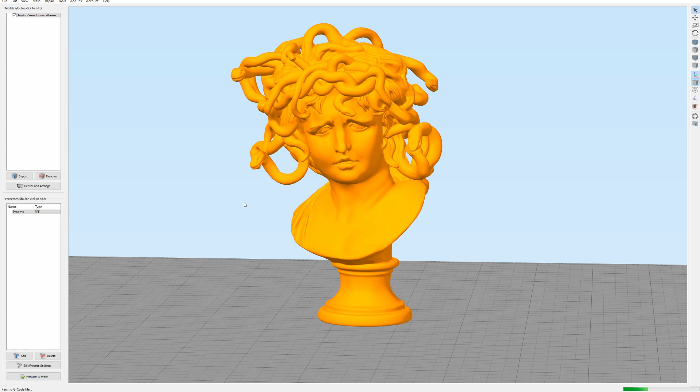Let's go to my left monitor and take a look over here. You can see that this print is going to be very challenging to print, because if I would prepare this for printing, I'm using the Simplify 3D slicer and it's now calculating the print and how it would make the G-code. This is going to be a very difficult print.

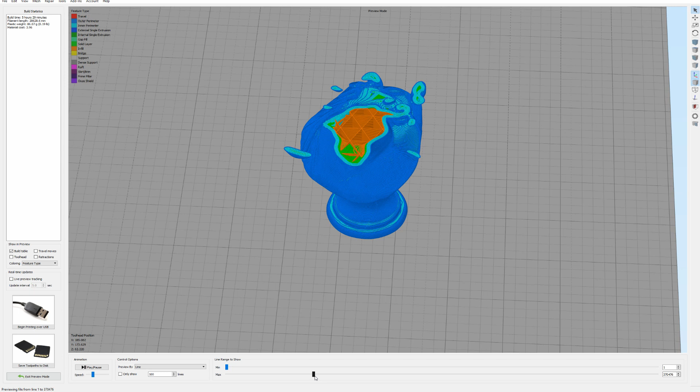I can show you guys here, because when this is printing, then suddenly here mid-air this starts to happen. It's going to try to put some filament, and the filament can't rest on something, so this won't be printable. The filament will be oozing out of the nozzle and will be hitting against the wall if you start to print things like this.

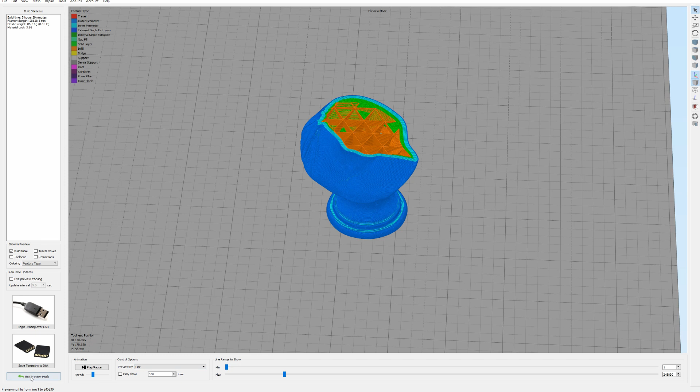Now there is a way we can support this, and the way to support this is by going back to the fabrication settings and just turning on support. Now when I've done this and I go to prepare this print again, then you will see that we generate some support, but we still have a problem.

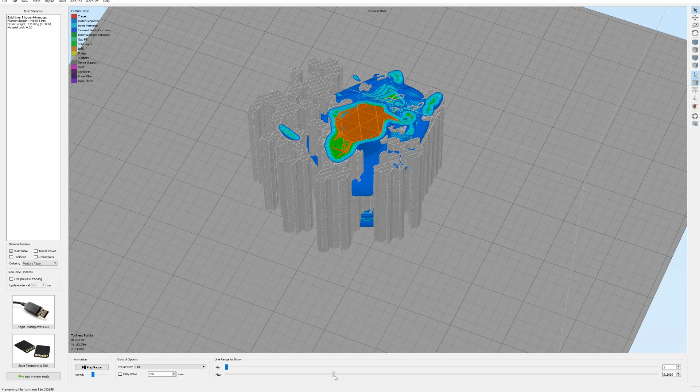As it's being calculated now, I can show you guys what the problem will be. Here I got the file, and it's printing everything with support structures. These pillars here are the support structures that will be printed. When we come to the point where things mid-air, like here for example, will be printed, then this will be printed on the support structure. So the filament basically stays in place, and this is how we can print the parts that are being printed mid-air.

Now I don't know if some of you already tried playing with support structures, but then you know that this is a very challenging part. The reason is that these are very thin lines that are being printed, and those very thin lines have a tendency to break away from the print bed. So they break away from your build platform, and therefore your support is not being strong.

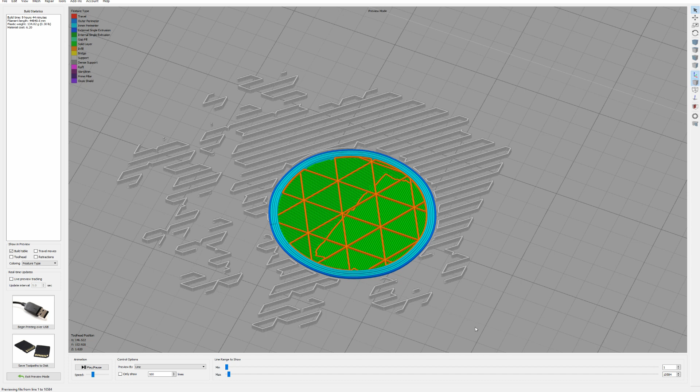There are things we can do about it, especially here in Simplify 3D. So I go back to the fabrication settings again, I go to my support tab, and here you can see that I can add some support parameters. Let me first add as an angle the 0 degree angle. So now we've got a 45 degree angle and a 0 degree angle. And I'm going to put another one in there as well, the 135 degree angle.

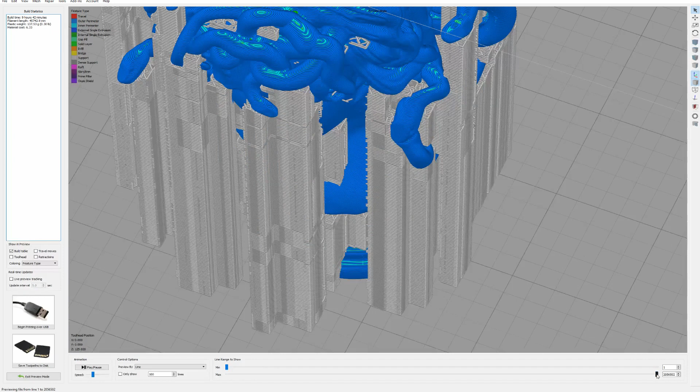Now you will see that when I prepare this for the print and it's being calculated, that something strange is going to happen. We are now building a very fundamental support structure. As you can see now, the support structures don't only have those lines like this, which was the 45 degree angle we normally used, but they also got a 135 degree angle and a 0 degree angle. And now there will be a much better adhesion to your printer bed.

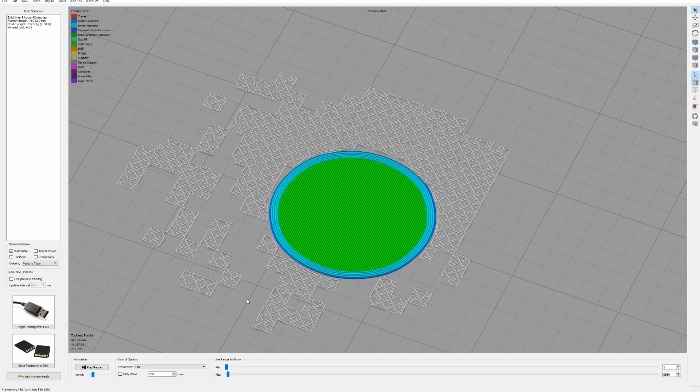So now this support won't break away that easy from your print bed. And this has to be a very high support, and then the chances are that even then this is going to break away from the print bed. So we have to make it even sturdier than it is right now.

I'm going to show you guys how I'm going to do this. Again, we go to the fabrication settings, and now we go to the additions, and we are going to use a raft. A raft is something that you build under your print. I'm going to use the normal settings that Simplify 3D already selected for me, which is that it's going to use the same extruder.

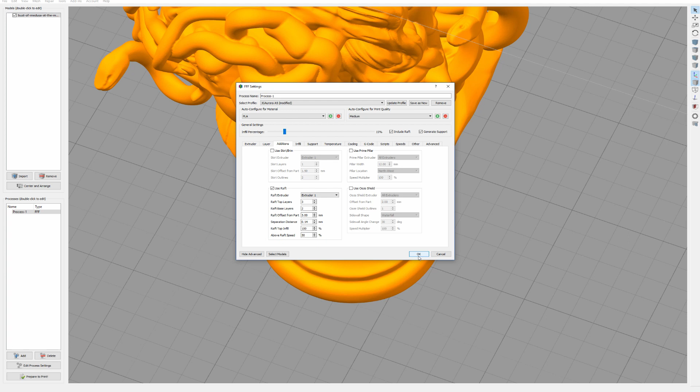It has 3 top raft layers, 2 base raft layers. The offset from the part will be 3 millimeters, and the separation distance will be 0.14 millimeter. Well, you can look them up, but this is quite normal.

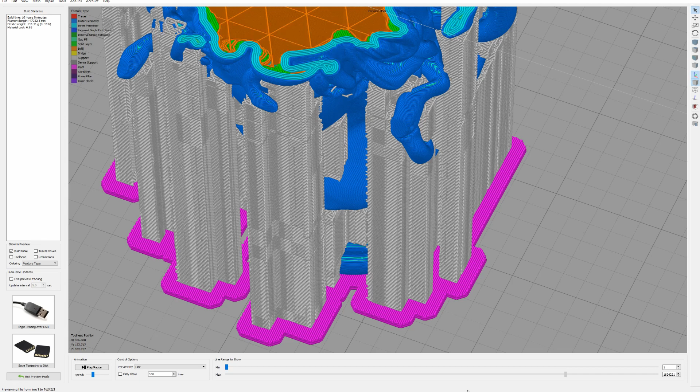Now, when I go to prepare this print again, then you will see, and I hope it slices pretty quickly, what the raft does for us. So again, I go to the very beginning of the print, and you see at first there will be a raft. There is no place where the print is starting, this is just the raft. Then the whole print will be printed on top of this raft. As you can see here, there is a big gap, but this is filled with some kind of bridge, which is here. And there the print will start.

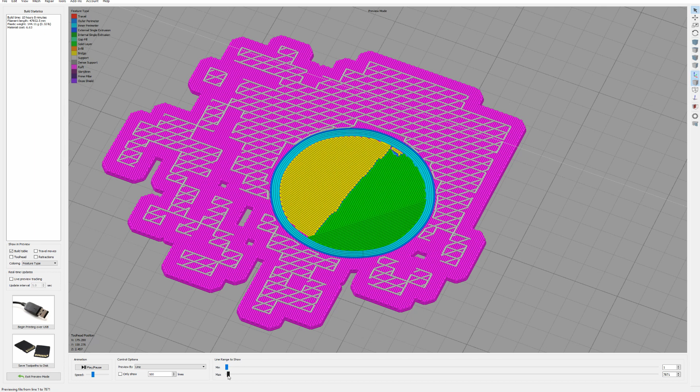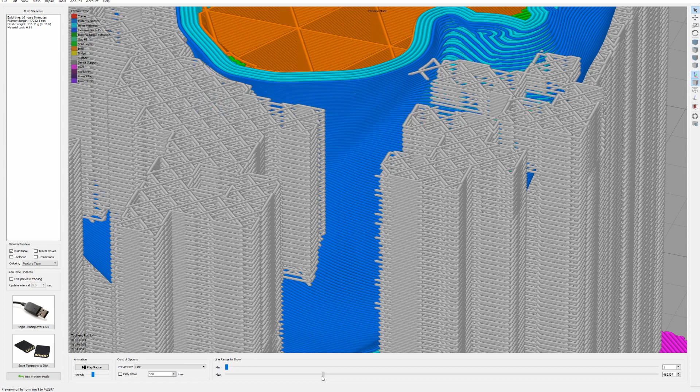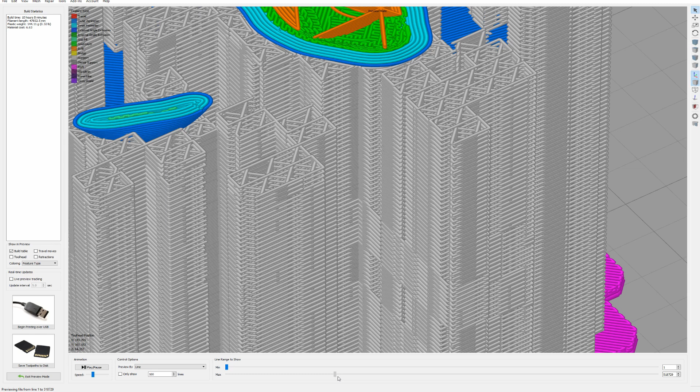When the raft stops, this plastic-to-plastic support structure will be brought in. Because the raft is plastic and the support is printed on plastic, it will be way stronger than support printed on your print bed. So this print will have a very strong support going all the way to the top. But if you have this much support and you're printing things on top of it, the support can be much stronger than the actual part, so you might break the original part instead of the support. We have to do something to fight this.

It's easy to fix. I'll show you by going back to the fabrication settings, but first we're going to do something different. We go to the tool settings and choose the variable setting wizard, which is found in Simplify 3D from version 4 and up.

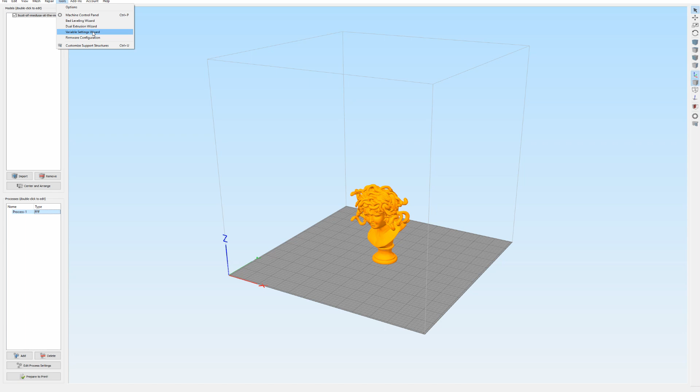If we click on this, you can see this red line, and we can select the height of this red line. If I set this to a certain height, I can choose this location as a location to add to my height. So I'll add this location, and you see it gets added here.

When I'm done, I go to the split process, and you'll see I have two processes. The second process is just a copy of the first one, so all my settings are already in this second process.

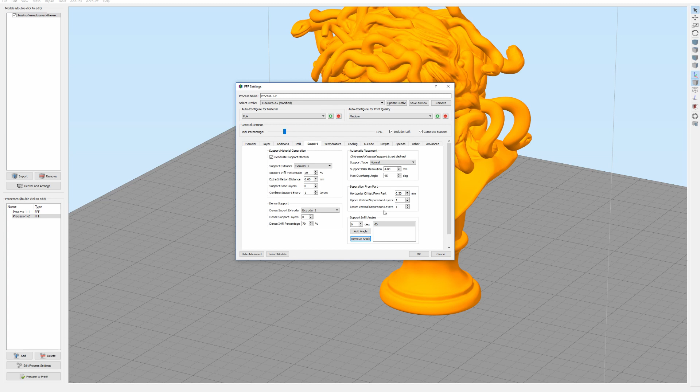Now I'm going to open it, go to my support tab, and remove the two angles I just added to make the support strong. Let's take a look at what this does.

I have to select all the processes when I slice this. It has to be a continuous, layer-by-layer print, not printed sequentially but continuously, and I click OK.

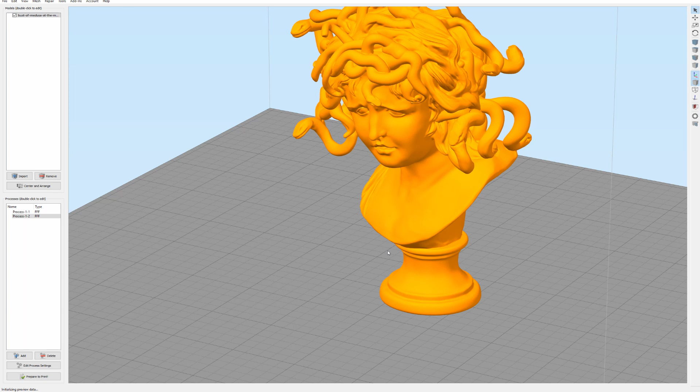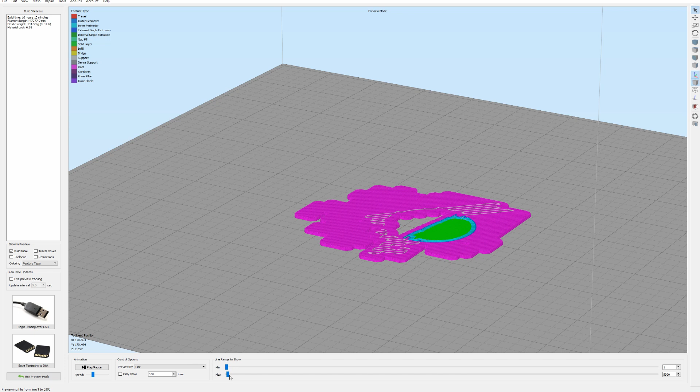Now it's being calculated by the computer again, and let's see what it does, because this is really a very strong feature in Simplify 3D which I happen to love so much. Here is the base, and you'll see this bottom layer provides very strong, solid adhesion to the support printed on top.

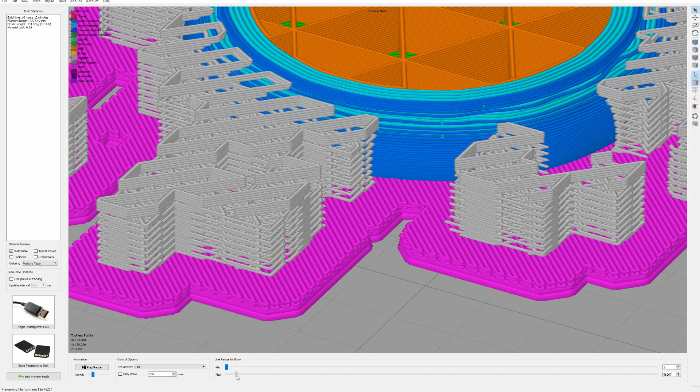Let's zoom in on this support - I have to do it like this. Let me turn it around a little, because at a certain height we stop with that very strong support and continue with normal support. Now the printer isn't relying on your heated print bed for this support, but on a very sturdy base of plastic at the bottom. Now you know for sure this support will hold up.

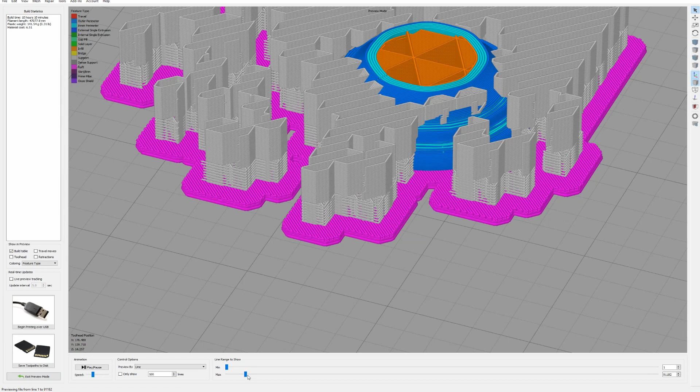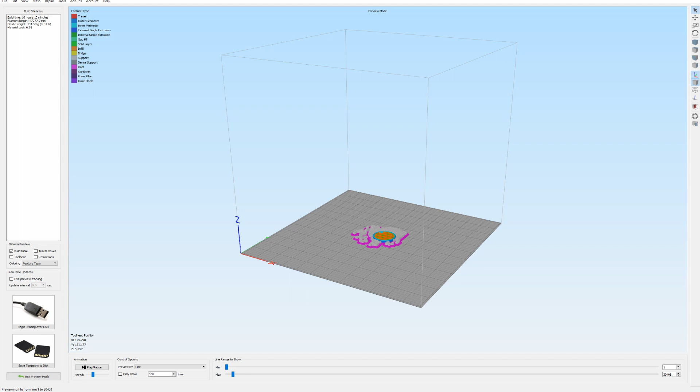It's printing all the way up, and everything will be printed on this support, as you can see here. This is a very reliable way of setting up supports, because you know the bottom part will be very strong, then there's a good plastic layer to build your support on, that support is very strong at the bottom so your base is solid, and then you start building your normal support, which is very good.

I hope you guys like this video, because it's very difficult to get good support structures if you don't know how to do it. So this is the way I do it, and I hope it helps you a lot when you're struggling with supports that break away from your print bed, because we all have this happening.